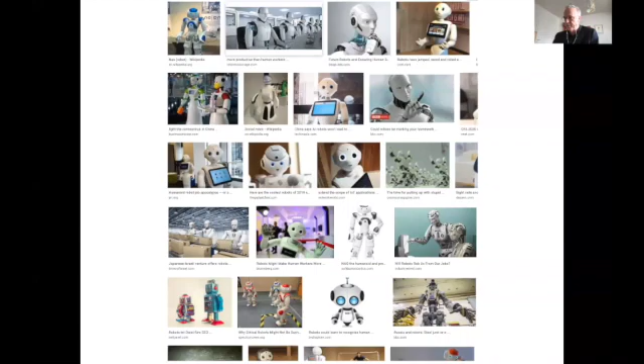Let me begin by talking about what the word robot means, or what people associate with robot. Last year, I did a Google search for the word robot in Google Images, and the first page was this. Kind of interesting, right? They're all humanoids, all pretty much fake robots that don't really work well.

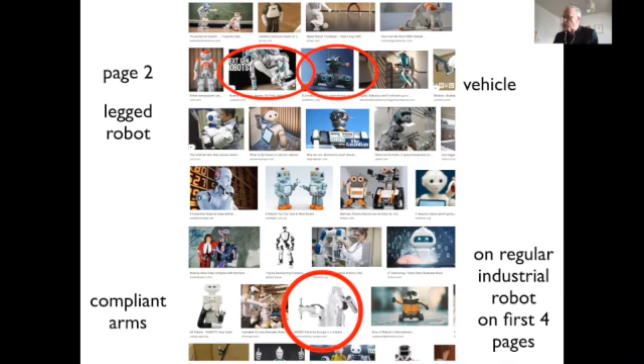And then anthropomorphic robots. On page 2, there was a legged robot, a vehicle, and an industrial robot. Even some compliant ones, I'm not sure which page that was. So all of the others are humanoids. Regular industrial robots on the first four pages were only this one here. Kind of interesting, right?

Of course, in reality, industrial robots are really the robots that are deployed, and there are millions of them around the world. While all these humanoids are not deployed, they are all research objects or toys, and generally autonomous robots are not very strongly deployed. There are actually increasingly autonomous vehicles deployed, and I'll say something about that later.

So this is just interesting about the perception. The perception of people is that robots are anthropomorphic or humanoid robots, and that of course is the old myth. There's deep sources - I'm just writing a paper about that - deep sources in mythology of the gods creating human-like machines and engaging them, giving them some kind of spirit and so on. It's an old idea, and it's a very popular idea.

And it's not entirely wrong, because I would say research, and we'll be talking about that, research in autonomous robotics is very much inspired by these myths, by these kinds of ideas, creating human-like or animal-like organisms.

Well, what robots actually technically still mean is really just programmable machines. So machines that are in some sense flexible, that have some kind of versatility. It's a form of automation that is flexible, so they can be quickly adjusted to different tasks.

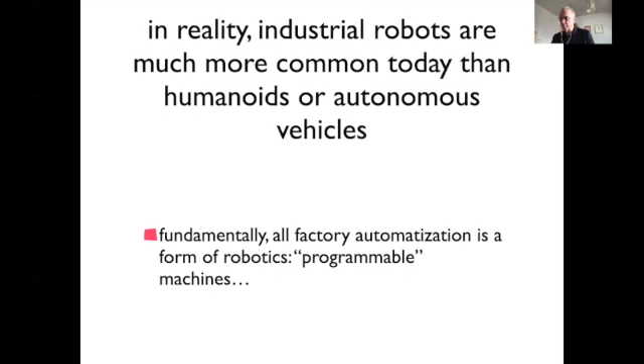I will not really be teaching about industrial robotics here at all. The emphasis - there will be a little bit about control - but there's a whole industry literally of software solutions for different aspects of industrial robotics, and that's not part of the course.

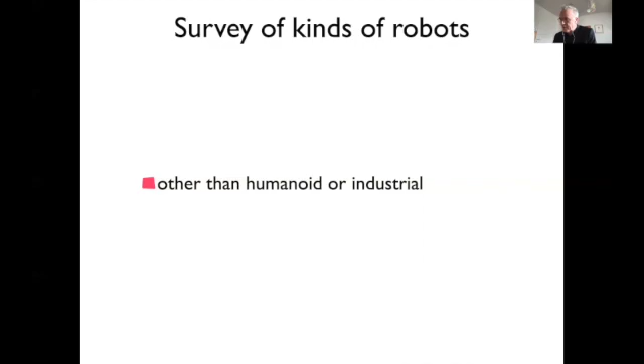So we're really talking about autonomous robots, of which humanoids are an example. I will not specifically talk about humanoids. I thought it was useful that I just flash a few pictures - you can Google that yourself in a few minutes - but just to give you a little bit of a flavor first of the sort of things we're talking about, what the hardware looks like, and by implication, what the use case is like. So the simplest are these...

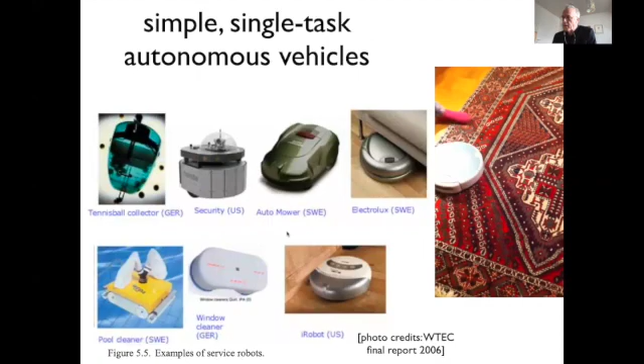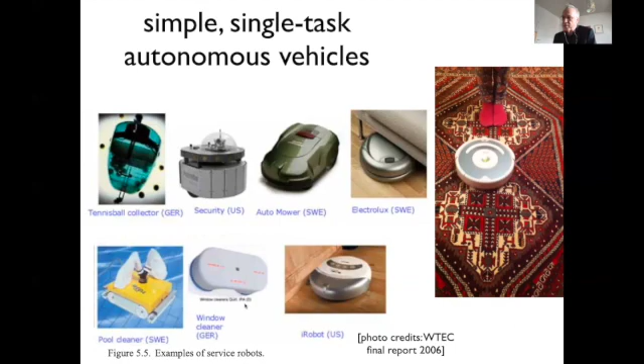And these pictures are even a little bit dated now - you can go to Saturn and get the latest model. So that is practically... they're typically robots that just cover ground, like a vacuum cleaner, and there are other cleaners like pool cleaners, some of them purely mechanical, tennis ball collectors, security robots, mowers, and so on. So that has become mainstream - it's no longer a topic of research.

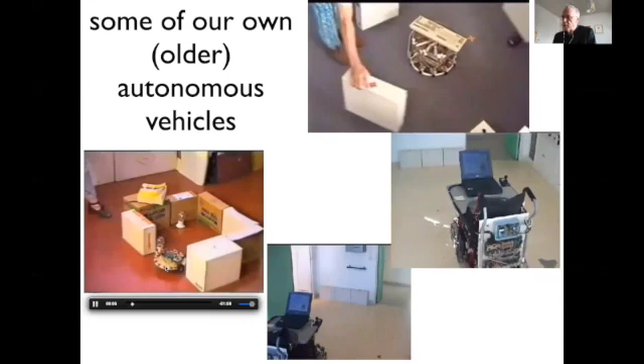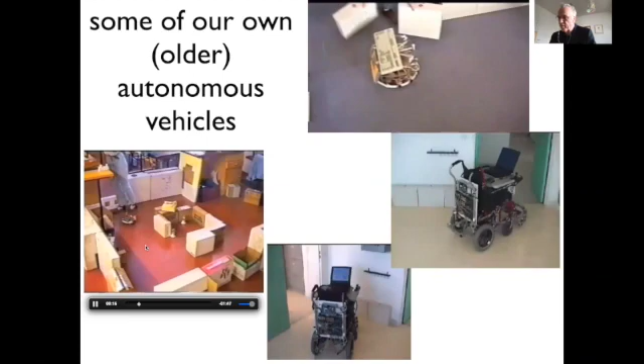Here's some of them I will be showing. This one is like a Lego robot - it's not actually, it has only very few pieces of Lego, but it's the electronics that's inside. It was an MIT lab robot, but now it's a part of Lego's Mindstorms. The electronics of that is the Lego Mindstorms robot.

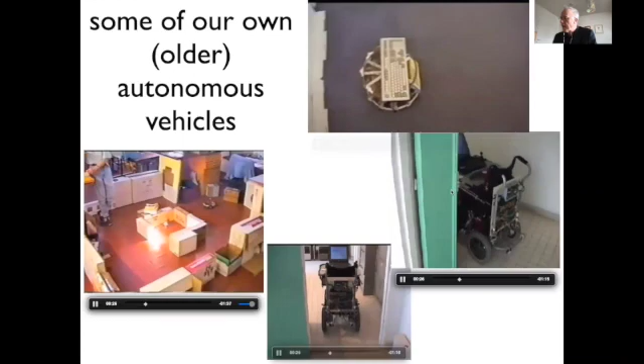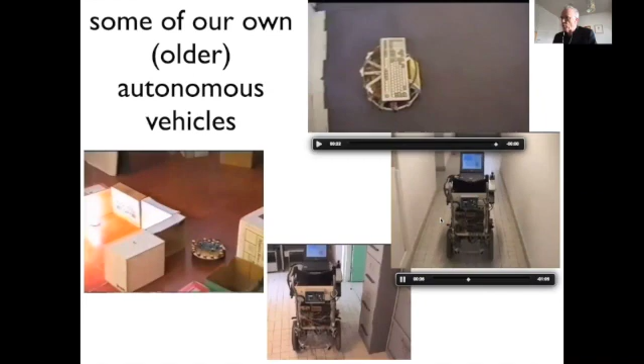This is a robot we built in Marseille, which I'll also be referring to, sort of a little bit larger than that, a little bit more capable. We actually built an autonomous wheelchair in Marseille, which did pretty well in corridor types of situations, even though it had very low-level sensors. Here in Bochum, we have stopped building robots ourselves - we were just using commercial robots.

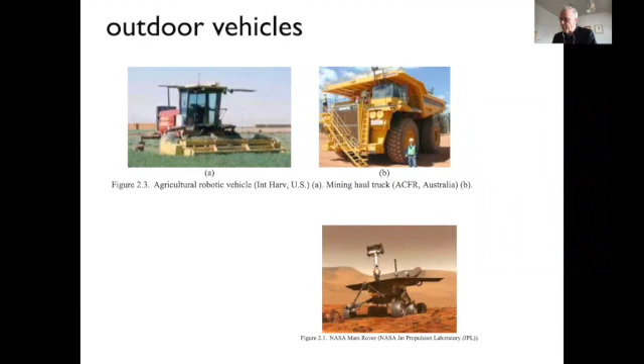Outdoor vehicles - these are even older pictures, there's a lot of that. You've famously heard that there is an autonomous robot on Mars. And then, of course, you know that autonomous driving is very much under research and advancing a lot. These are, technically speaking, autonomous robots, right? There are really two classes of autonomous robots: arms and vehicles. And vehicles are actually much more advanced, for reasons that make sense - I'll come to that later.

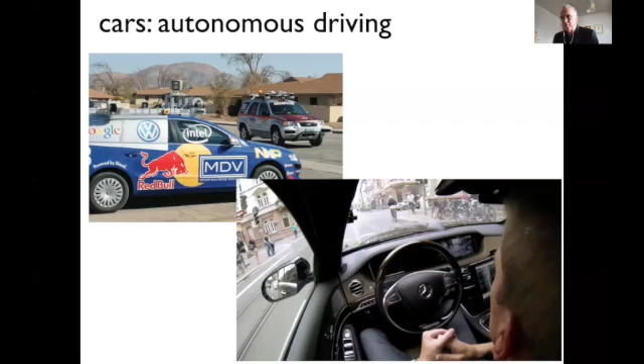The perceptual problems are simpler than those of arms that orient at objects. So it's part of robotics. Legged robotics is an area of research.

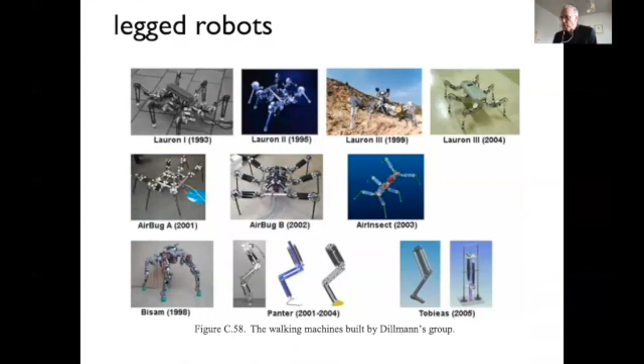A lot of these are just from one lab. You've seen videos, I'm sure, of that. Humanoids would be part of the legged robots. It's a very interesting problem. Not always so clear it's really practical, but it's certainly interesting from a control engineering point of view.

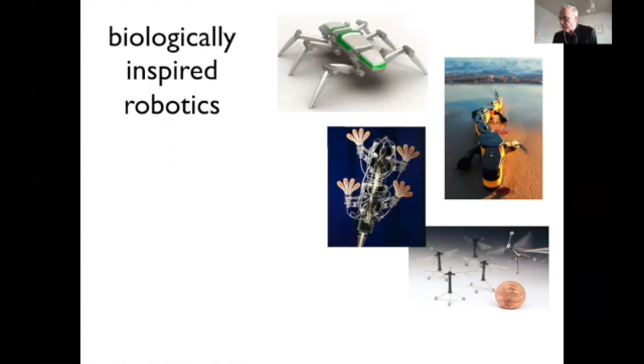A lot of those are biologically inspired, so often inspired by the fact that animals don't have wheels, for also interesting reasons, and the design ideas for such robots are often inspired by organisms.

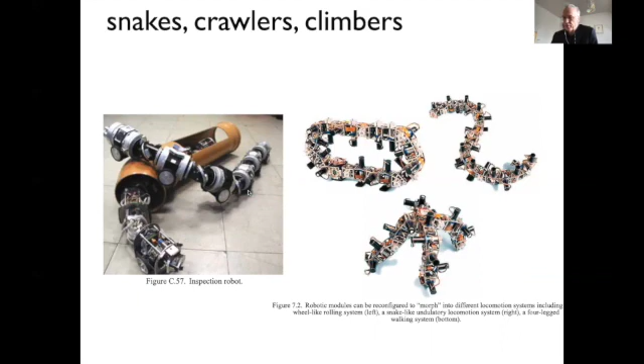There are other sort of non-standard robots like crawlers and climbers and snakes, for instance, for inspection. There was a project here at Ruhr University in Maschinenbau, who were looking at pipe cleaning robots of that nature. You could say it's also somewhat biologically inspired because they're animals who move in that form.

Underwater robots would be just autonomous ships or submarines. I mean, they're underwater or surface water vehicles. So that is actually relatively easy because the water is quite homogeneous, much easier to move in water. They have different problems, they have perception problems and they have communication problems because it's not so easy to communicate underwater. So often you have lifelines, for instance, to simplify that.

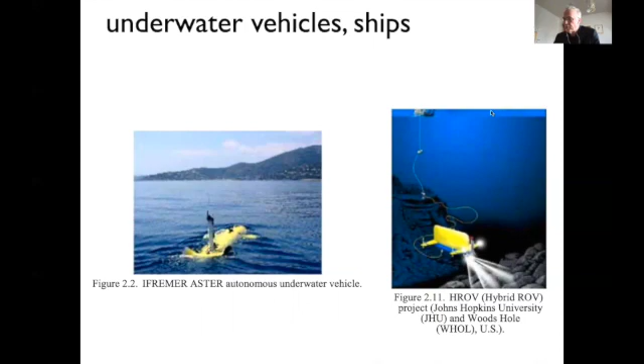And then there are vehicles. Somebody already mentioned a drone. Drones are now very attractive for this kind of research. Usually drones are not autonomous, but when they are autonomous, that's an interesting platform. Again, their navigation is actually relatively simple in a 3D homogeneous medium.

It's just a question of control. And many of these don't actually do obstacle avoidance. So simple tasks are things like doing autonomous docking and autonomous avoidance of collision. There's a lot of military work on these sort of things.

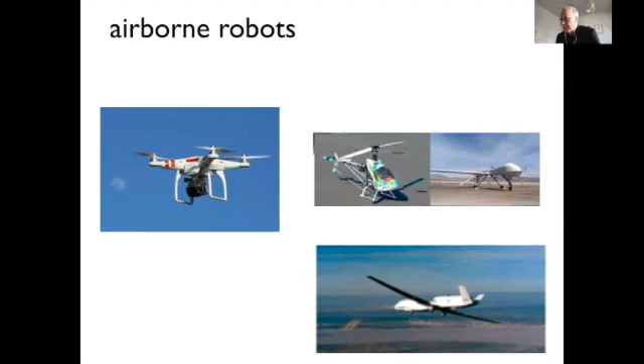In drones, and primarily in drones, a big problem is the energy consumption. So the computation that is required in implementing some of the autonomous algorithms is quite heavy, and the drones are very short on energy, so there's a limit there. And actually, I'm involved in some work where we look at neuromorphic devices, so computing devices that already take neural ideas into account and are hoped to be much more energy efficient, even though it's still a struggle.

Then hands and manipulators are interesting. The industrial robots have grippers that are adapted to the sorts of objects they will interact with. And generally, interaction with objects is not a strong point of industrial robots. As soon as an industrial robot touches something with force being transmitted, there are problems, and it's a big topic of research how to do that.

We humans have wonderful manipulable hands, flexible hands, and they're full of sensors. And we are very good at manipulating objects when we have a sense of touch. Maybe a few of you might have witnessed the absence. Even if you put on gloves, your manipulation skills are not anywhere near as good. Or, for instance, if you have very cold hands and you manipulate something, then you might have noticed how clumsy you are. And there are laboratory versions where you actually anesthetize the hand and can then demonstrate that active sensing is very important for our manipulation skills.

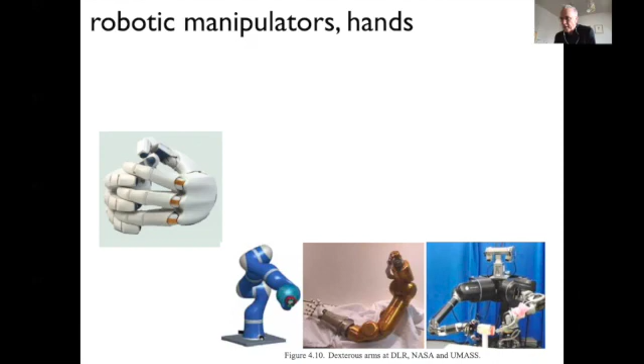So there's a lot of work in doing that. We had a project with a hand that has a touch surface. I think I have it here. This hand actually has a little touch surface here. And I'd like the sound a little lower. It was supposed to help you with that perception. Frankly, it doesn't really work very well. It's still very, very primitive.

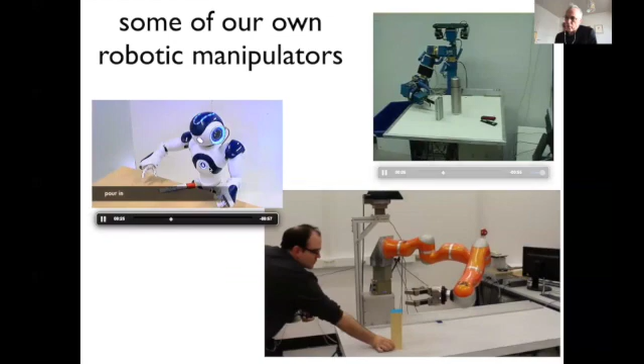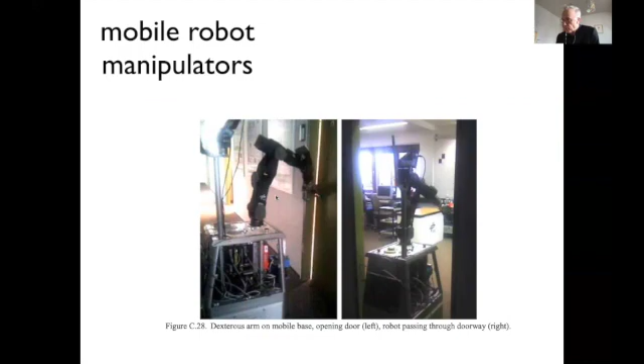The combination of these two streams, the hands and the vehicles, would be arms mounted on vehicles, and there's a lot of work on that. This is some old photo, I don't remember exactly. There's a lot of work on that as well. We had our own, we called it Arnold, like Schwarzenegger, because it has this very heavy set, sorry.

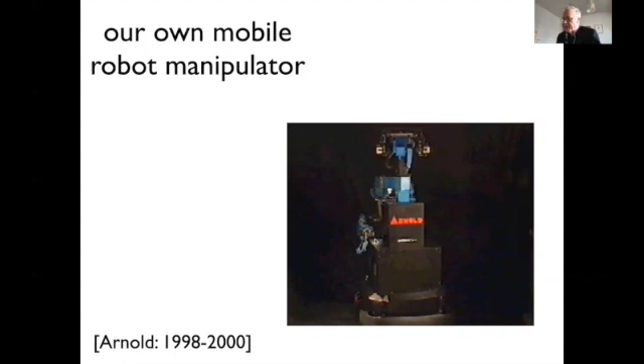And it actually did one task very, very well, moving around rooms and grasping something, opening doors, but highly programmed. I'll come to some of those difficulties.

So that's already a decade old or longer, two decades actually now. So that gives you a bit of a survey here. And I want to now talk a little bit about what autonomous really means, and that will give me an opportunity to explain better why vehicles are more advanced than robot arms.

So autonomous, literally, it means giving - comes from auto-nomos, nomos would be laws. It is giving oneself the laws and creating one's own laws of behavior.

And so self means in practice that it's based on information that the system itself acquires about the environment in which it acts. So typically would be onboard sensors. Maybe the sensors could be, doesn't always have to be physically on the body, but would be accessed by that system. It would not be pre-processed with the help of outside systems.

For instance, an industrial robot would have a complete plan of where everything is on that table that's provided to the robot, and there's a fixed action plan that would act on that information. So everything in that sense is pre-programmed. It's flexible in that you can reprogram it, but it is not flexible in the sense that it would itself acquire the information that is required to act, and therefore it wouldn't reprogram itself. It would have to be reprogrammed for a new task.

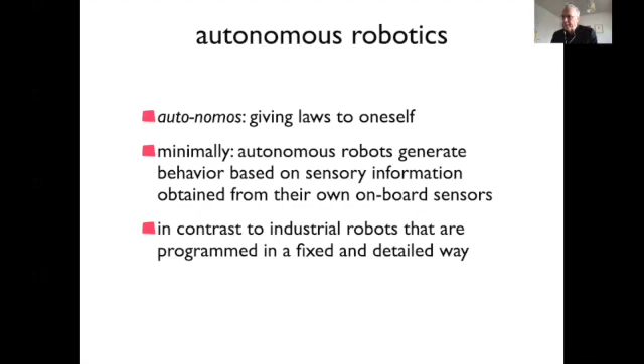So that's roughly autonomy. And so I'll come back to this question of vehicles in a moment.

This sounds maybe clearer. If you look a little bit more closely, then you recognize, of course, that all robots are controlled - engineers will know what I mean by control. So they actually all have some form of feedback control. There is some sensor that informs about the state of the robot and that corrects the state of the robot.

So for instance, minimally an industrial robot will have some form of servoing that is estimating the pose of a joint, of a robotic joint, and then sending currents to the motors there to make sure that that joint has, for instance, a desired joint velocity or has a desired position.

Such control is also called autonomous control because you have a sensor to control. We wouldn't call that really robotics in the sense of autonomous robotics, in that it is really very limited. It's just given a set value and you realize just that one set value. Well, in robotics, we expect something more complex to happen, more than just controlling for one particular value.

To make that precise isn't quite so easy. One can think about decisions being decisive, that you bring about some decision, you make up your mind, for instance, you go around an obstacle on the left or on the right. Now, that will be something that is more than control - it is making a decision. Like if you reach for an object, maybe if you have multiple objects and you select one, you could say, well, that is a decision, and that's not just control.

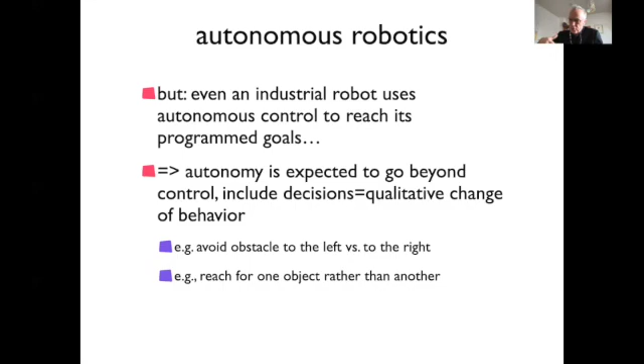It's not entirely clear how easy that is. For instance, some of you might know that optimal control, in a sense, generates an appropriate motor command to achieve a goal, and then it's more than just one value - it's an entire trajectory that's generated. So where the exact boundary is not so clear, but certainly autonomous robotics is meant to go beyond control, beyond autonomous control. That's what traditionally is the motion planning part there, where the complexity comes in. In these neurally inspired robotics, it's not so clear if planning and control are really different.

So that's technically what autonomy is.

Sometimes people also think autonomous means that the robot does what it wants, right? It has some program according to which it would decide, for instance, to go back to home base to charge and to maybe explore the environment, to improve its map, and so on. And some algorithms are like that.

That is actually also not entirely what we want. There is often an idea that there would be some kind of limitation on how autonomous the robot can be, which is that we want it to fulfill certain tasks, which really means we want to give orders to the robot.

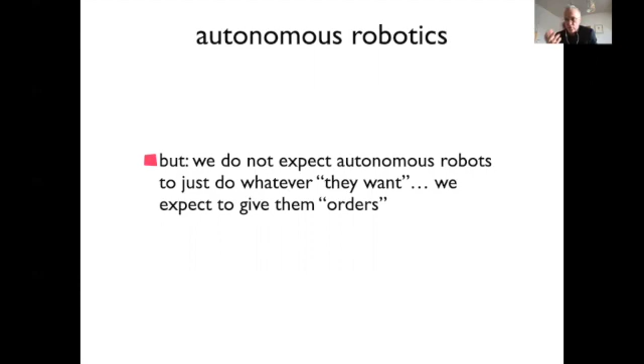Maybe the one reason why we want to have a robot rather than, say, train our dog is that we hope we'd be able to give orders to the robot very easily, while it takes forever to train your dog, and certain things it would never be willing or able to do.

So that's a view of autonomy where you'd say, well, I can give orders to the robot, but I can do it at a relatively high level. In this demo, the idea was you can give it orders at the level of language and gesture. So it's not programming, even though technically you're setting goals for the robot through that interface, and the autonomy consists of the robot dealing with the details.

That is, figuring out in each case what specific movement it needs to make, and what part of the perceptual array to analyze and extract the pose information about the object from, and so on.

So that's probably the most reasonable narrowing in of the concept of autonomous. There is some degree of autonomy at the low level, but the goal setting comes from an interface to a human user, or something that's programmed again. For instance, maybe a military robot you'd program to shoot down enemy planes, and you're only giving autonomy within that global task.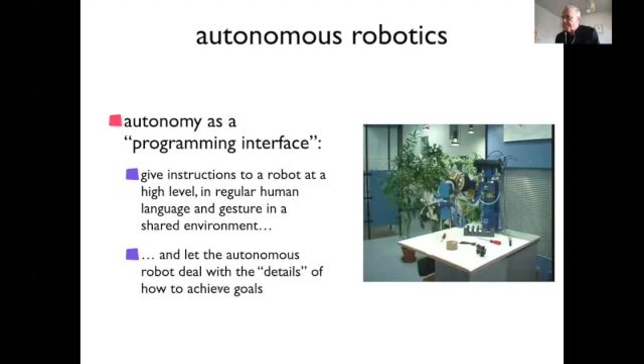So why would we want to do that? Why build autonomous robots? I've asked a lot of people, including my son, and sometimes people say, oh, do something cool, like serve drinks or clean up my kitchen. Robot soldiers come to mind very easily. That's analogous to what happens when you Google robotics - it's always these humanoid robots.

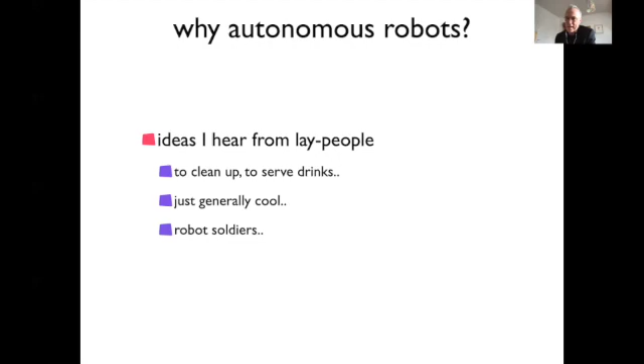One can be a bit skeptical about whether these are good reasons - it's very far from reality. Actually, the autonomous robots that are deployed are often purpose-free. A lot of them are just toys or for fun, and they're also very limited in what they can do.

There is some serious effort in making robots part of therapy. There's a lot of work on autism. Somehow severely autistic people sometimes have less trouble interacting with a robot than with a human, for some reason that people now study. It's a very special case.

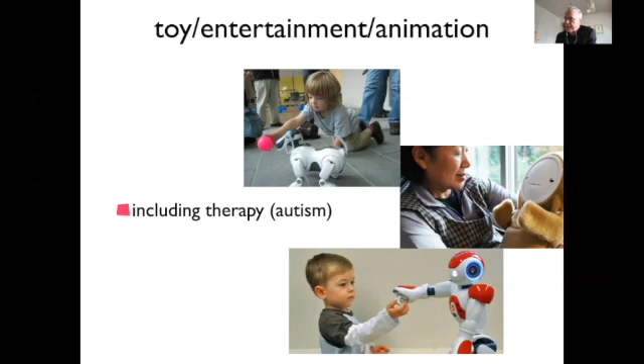So there's that domain where it's not achieving very specific goals - it's really just some interesting interactive thing. The goal of a lot of work, where that would be the first stage, would be to have real assistance systems. So that's the official thing.

It's actually interesting - the European Union very much funds assistance systems, based on improving life for humans. It's very much this humanitarian European perspective. For instance, the US is much more interested in military robots, and interestingly, the Japanese and Koreans are very much interested in toy robots. So interesting cultural biases - we Europeans, it's always about being the good guys, morally, and helping.

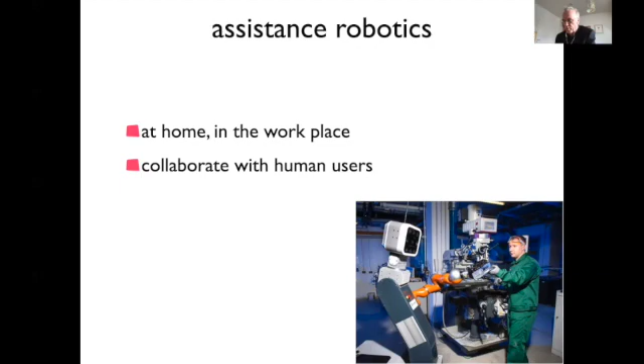So that's a research program. I would say actual human assistance robots are all in the lab - there is no real working system at the moment, certainly not when it's mechanical. There are some dialogue systems, but not when it's anything where there's an actual actuator that does something.

But it's very developed, as I mentioned earlier, autonomous driving and in all kinds of... sorry, actually I don't have the right picture for this.

Autonomous driving is much easier than object-oriented action because perception is much simpler. You can actually see that in the animal kingdom. If you think of animals, almost all animals achieve almost everything they do like a vehicle, with their body. What that means is that the sensor moves with the body. So for instance, if you walk around, your eyes are carried through the world, and therefore the sensory information in the eyes depends on the action. So they're immediately part of a closed loop.

For instance, when you walk, there will be an optic flow on your retina that goes backwards, and that informs you about how fast you walk. Or if you stand, it informs you about whether you're falling forwards or backwards. That enables strategies where you can use sensory information in a fairly global way. You can just average the visual velocity on the visual array to have an estimate of your ego motion. There's some work on that without having to distinguish between different objects in the world and distances and things like that.

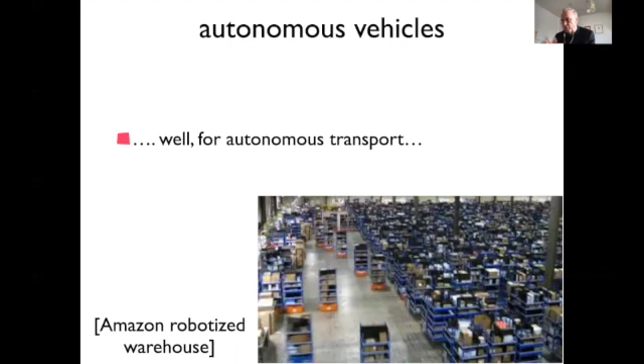Now, the other use of autonomous robotics is military. We don't learn so much about that because a lot of the work is confidential. It's an ideal application from a technical point of view because it makes sense to take humans out of the equation when you're trying to kill each other, and it's difficult to do all of that with remote control under relevant circumstances. So that's very attractive—there's a lot of work on it. A lot of people don't find it ethically okay to do that research; you can have different views on that. The milder European version would be catastrophe firefighting rescue robots, but because they have very special applications, not such a broad scenario—there is some work on that, but it's not very advanced actually.

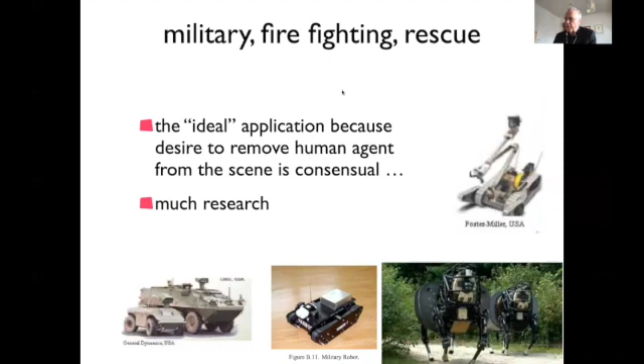There are interesting ethical issues here, and they don't show up only in military robots, where you want to maybe have a human in the loop for deciding something lethal. It's actually been practiced for a long time that under certain circumstances, ships would automatically fire at incoming rockets—so it doesn't have to be really modern robotics to do that. There's also a lot of discussion about this in autonomous cars: if you have avoidance strategies, to which extent do you protect the passenger versus the pedestrian, and what kind of trade-offs can the algorithm make. Interesting stuff. It's still a bit premature since these aren't deployed yet, but in autonomous cars it becomes relevant soon.

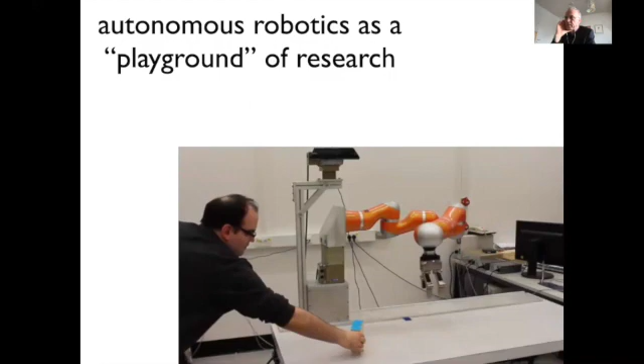Now, the true reason, I believe, why many of us actually do this research is that it is a very nice research platform—a wonderful playground for research. I'm going to give you three arguments why that is the case, or three concrete forms that takes.

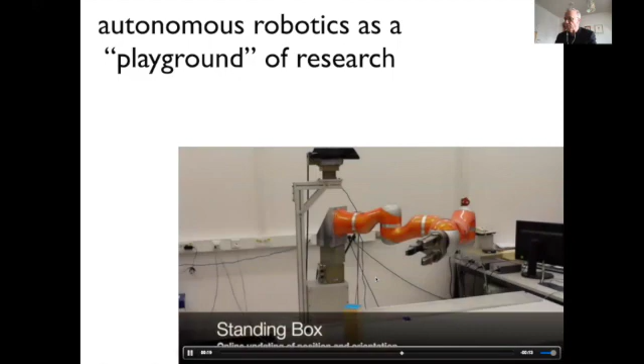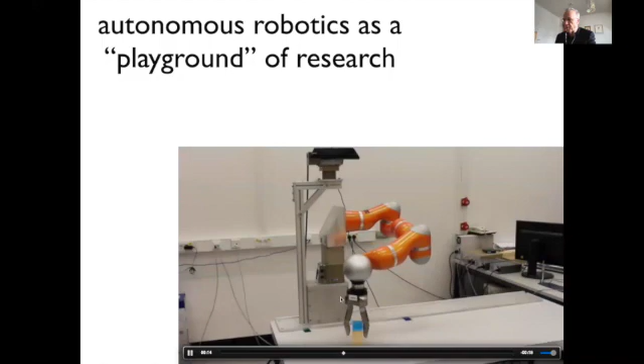This is a little video from something we did, and this demo is about online updating, where the object is shifted after the robot has begun to move. The special research question here is that all this movement, even though it looks a bit jerky—and now the movie is running backwards—is actually one dynamical system unfolding in time. There is no algorithm here other than the numerical solution of the equation. So it's clearly a research demonstration, not about this being a practical skill. Now, why is it an interesting research platform?

One global way to talk about that is to say a lot of modern engineering is based on a core idea, which is that you model systems very well, and then you can predict everything about them except for some noisiness, stochastic, which you treat by stochastic models. Combining the stochastic models with the prediction, you control these systems very well.

There's a lot of theory about that, Kalman filters, optimal control, and with that we've been able to solve a lot of problems. Initially it was very hard to control rockets because rockets change their inertia very drastically, initially full of fuel, then a little later they're empty. So the same control signal will be too weak when they're full, and too strong when they're empty. Very clean theory was developed about how to do that optimally today, and all of that is very successful.

So you could say autonomous robotics is exactly pushing the limits on that, because in autonomous robotics you want them to act in what we call natural environments, that is, environments that are difficult to model. That's what it actually means. Natural environment means we don't have a good model of it. The industrial robot would be the extreme, where you have a CAD model of the product and of the work environment. Everything is pre-coded, and there you can very well work with classical robotics. As you introduce more uncertainty, and maybe even categorical errors where there are objects for which you don't even have a model, you have to develop new techniques to deal with them. That's very interesting, so that's driven a lot of research in that domain.

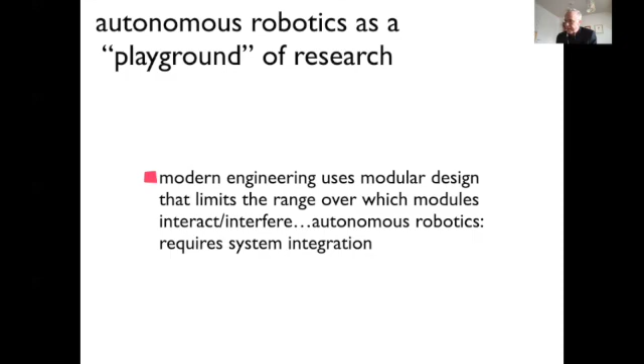A third reason is just the interdisciplinary nature of it. That's maybe less about research, and also about training and application. For instance, a lot of student projects are around robotics and often attract students.

Part of the fascination is that when you build a robot, maybe a drone, and want to program it, you have to deal with all the different components. You have mechanical hardware, maybe sensor and electronic hardware. You need to wire it up so they all communicate, you need a programming interface, you probably need some embedded computing to do anything reasonable. And more globally, you have control, AI, planning, and perception.

These three, perception, control, and planning, or artificial intelligence, are the more typical autonomous robotics problems, and they always depend on each other. It depends on what perception means, what information about the world you extract from your sensors, and that will be your world model. What you plan can depend on what you have available from perception. And when you plan something, you have to take into account whether you can actually control and achieve that with your plan. There might be constraints from achievement that you want to put into your plan, for instance limits on acceleration or maximal forces you could generate.

So that's quite a large range of subdisciplines. Communication, where I mentioned data security, is a whole different area than, say, mechanical engineering or even control engineering. User interfaces, how you program those, is a different discipline. So a lot of different fields are connected when you're building autonomous robots. That's an interesting challenge.

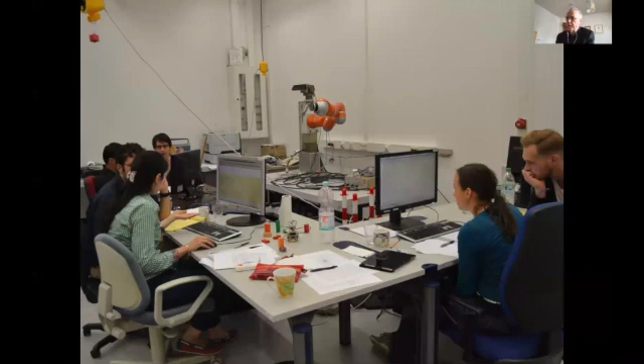Image processing would be filtering that, or enhancing contrast, or all kinds of things. But what we mean by computer vision is that we find out about the world, the 3D world and its properties, from the image or from a video.

For instance, you might be attentionally attracted to this arm, and selecting that arm as the center of your attention is one achievement. Maybe you have a task like, where's the robot, or which brand robot is in that picture, and then you have to find where the robot is, recognize it as a robot, and focus on that robot.

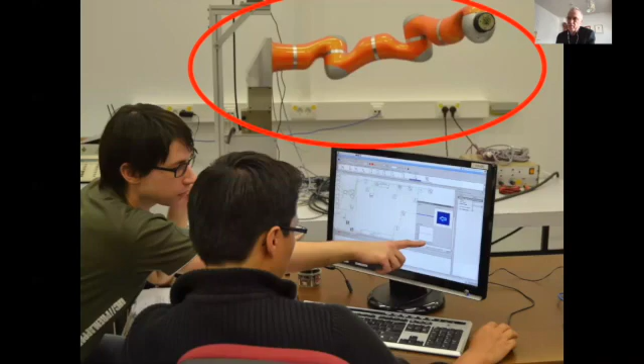And maybe when the view changes, you might have to recognize that it's the same robot from a different view. So these are the four categorical problems in perception: this form of attentional control that's not very well dealt with so far.

Classification or recognition, which is actually currently being improved a lot, sometimes to superhuman performance. Segmentation, knowing precisely where the boundaries of an object are in the image, maybe also in a world model. And then estimating the pose, orientation, or certain other parameter values.

Those are all problems that are important in perception, and they are particularly important when you want to estimate properties of objects that you want to direct your action at. That's why reaching and grasping is challenging.

When you do control of a vehicle, you often don't need attentional control. You might need some classification, like traffic signs and little things like that, but not for a lot of tasks. You very often don't need real segmentation, and estimation is often just limited to estimating your pose, like in a map, or your pose on the road, and so on.

In the winter semester, I'm teaching about some aspects of that, but with a much more strong neural perspective than I'm mentioning now.

Let's skip that. The interaction with humans is also a very active research field. This would be that programming interface, how to talk to robots. And I feel that hasn't made that terribly much progress. I was sort of seeing very similar ideas for many years.

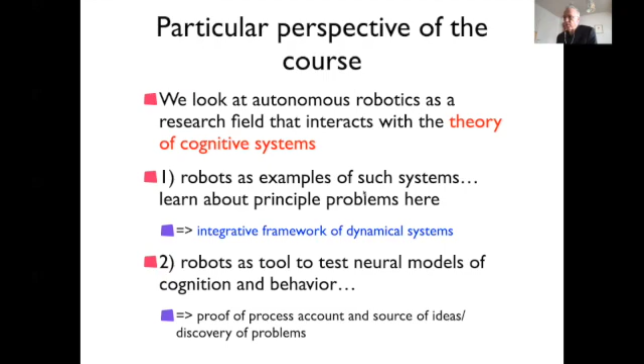So in the course, this first part will be the most visible part. Dynamical systems—I'll give a tutorial about that next week—take the form here of what we'll call behavioral dynamics, which is more what control theory is about.

As contrasted to behavioral dynamics, neurodynamics would be the inner state of the nervous system, which is really the topic of the winter semester course. I will be touching on some aspects of that. Those who have listened to me in the winter semester know that we mainly talk about population code or space code, where peaks of activation over some space represent states.

Here I will be sometimes talking about the rate code picture, where activation itself evolves in time. For instance, when you make a movement and activation goes up and down as your muscles contract or not. So I will be using neurodynamics only in that more special sense.

Other than that, it would be largely behavioral dynamics. So this course is not just a standard introduction into autonomous robotics and technical introduction. If you take a textbook of robotics, there will be some overlap, like path planning will be a little bit like that. I will have a short introduction into some kinematics, but about half of what we do in the course is not standard autonomous robotics. So it's not intended to be a course for a curriculum in autonomous robotics, like maybe the Dortmund program. This is somewhat unorthodox, a perspective that is really driven by this analogy to the nervous system.

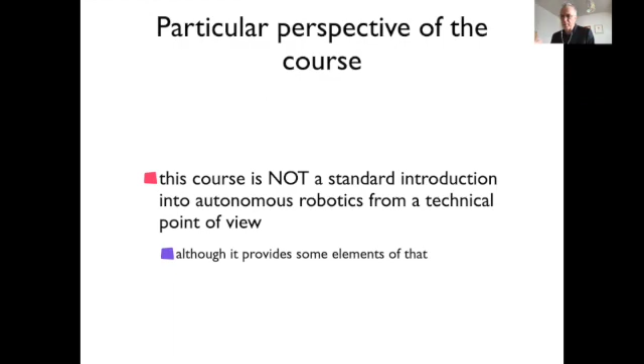So here's a syllabus, a survey over the contents of the course. I will begin next week by giving a brief dynamical systems tutorial. Some of you might have heard parts of that in the winter semester. It overlaps with that, and it's sort of to get you up to speed.

It's often something where the first couple slides, you will think that's very well known if you're an engineer or physicist, but you will see it actually goes a bit to the limits of your knowledge. I will end up on bifurcations, for instance, bifurcation theory and things like that.

And then we will actually use these concepts right in the first approach to vehicle path planning, which is the attractor dynamics approach, which I myself developed. I'll also give a survey over some other approaches and compare. There will be an interesting comparison to what's called the potential field approach. And I will also give some link to more recent approaches, like the dynamic window approach.

And that will be sort of one block. It takes about 4 or 5 lectures, I remember, maybe 4 lectures. It's actually different levels of the attractor dynamics approach. I'll show you some hardware implementations. I'll also show you how these approaches model human behavior.

When humans locomote, their path in the plane is sort of like a vehicle path. How do you walk as a pedestrian? And it's not about the leg falling, but about the body in space. Actually, some of these models have been used to model human pedestrian behavior, and I'll show you some of that.

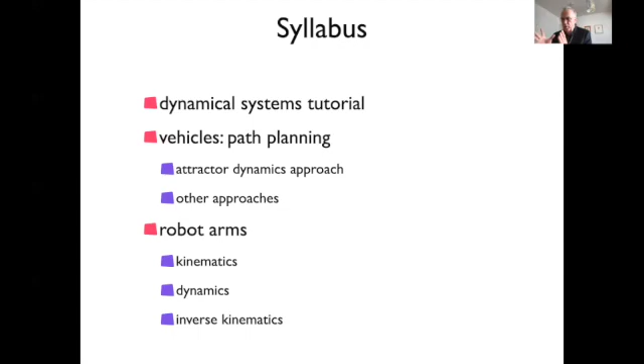So it will be quite compressed and just more conceptual. I will then actually talk about movement generation in a much more biologically inspired way, talk about coordination, timing, the generation of time courses, movement primitives. I'll hint at a neural architecture of what we know about how the brain generates such time courses.

And then there will be a chapter about motor control. Motor control really means how you physically bring about the movement with actuators, and that includes controlling them, that is, updating their commands based on the outcome. So I'll have a quick lecture on the technical way of how control is viewed for arms, like inverse dynamics and computed torque, and so on. But that will all be compressed quite strongly, since in a regular robotics course this would take a major emphasis.

And then we'll talk about human motor control. We know about it and about muscles, the dynamics of muscles. They don't generate force instantaneously, or not very fast. It's actually quite noticeably delayed over the motor commands, and reflexes contribute. The reflexes are active during the movement, and they actually sometimes oppose movement. You have to understand how that is taken into account. And that will be the end point of the course, going back really to biological movement, or movement generated by organisms.